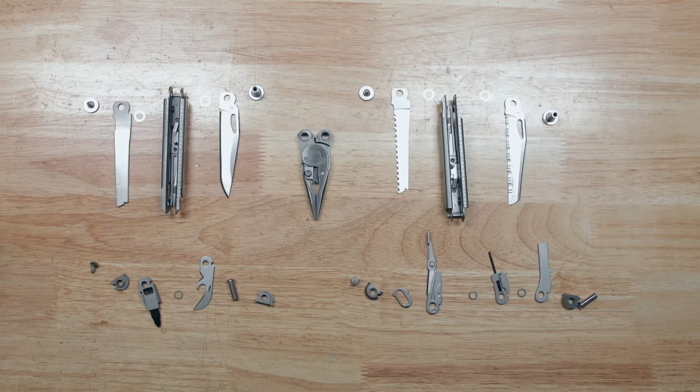This used to be a Leatherman wave. Obviously I've taken it apart, and typically when I take a multi-tool apart, I like to lay it out like this in the order that it was disassembled, so I know exactly how to put these things back together, working from the outside in. If you don't have a system, it can become really quite difficult.

But today, what we are going to do is take all of these parts, get those washers, and mix them all up and try to put it back together.

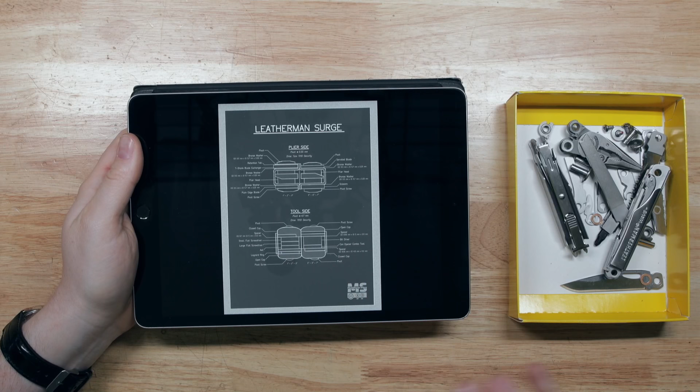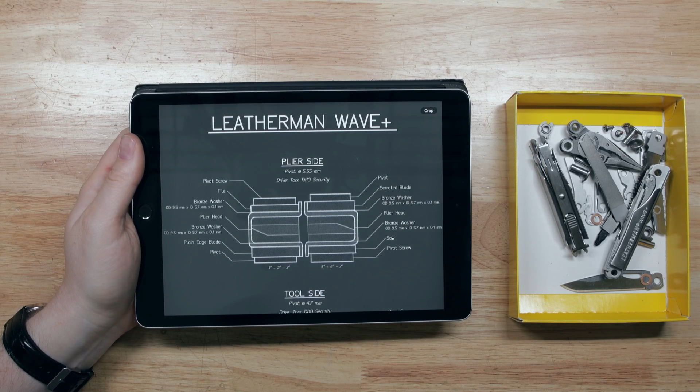Each of these diagrams has some useful information. We've got the pivot diameter as well as the drive size for that particular pivot set. We've also got callouts for the washers so you can see what size they are, because a lot of them look the same but are slightly different. All of this comes together to give you a comprehensive look at the construction of your particular tool.

So to see this in use, we've got our Wave Plus diagram here. You can see it says Wave Plus right up at the top. We've got that pivot information, and we know we're going to be using the T10 security Torx, which I've already got ready in our screwdrivers. So let's try and rebuild this Leatherman wave.

I'm going to start by finding the frame side I want. This one, you can see at the top, maybe says 1, 2, and 3 on the inch markings, and you'll see matching callouts here so you know which side of the frame goes where. I'm going to slide this off to about there so I can get to work.

That's the side we're going to start with. I would typically use just a simple brass punch to assemble these, but we're testing out some assembly tools that we'll talk about in a future video. So let's get to work.

I want to start with the plier head, and one thing I want to check here on the 1, 2, 3 side is which way the pivot screw comes in. You can see the pivot screws at the top, which means the pivot comes in from the bottom here. By the way, all of these are based off photos I've taken from the end of the tool, so if that helps orient that in your mind, I'll mention it now.

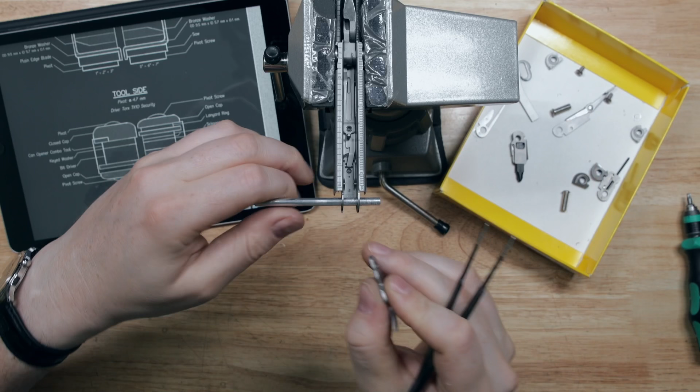And inside of our tool, we're going to start with the can opener on this side. So let's grab that. You know, as many of these tools as I have taken apart and put back together, I still cannot remember exactly what goes where.

And that's just on this tool. There's, like I said, lots of different tools available, so hopefully it'll help some of you guys out. I'm going to grab a keyed washer here and add that on next.

Tweezers are just helping my fat fingers find their way in between these frames. And next up should be, yes, it is the bit driver. So let's add that in place.

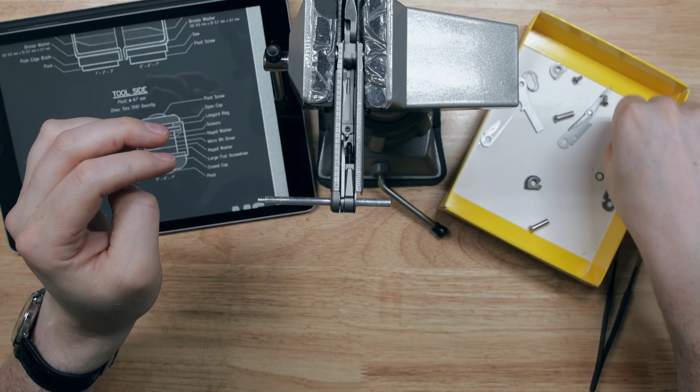And we can start adding our caps to the outside. Should be that guy there. These are all, like I said, called out in the diagrams. The lanyard ring does not go on this side. That's one thing I wanted to check.

And now we can get our pivot in place and drop it in like so. I lost our cap. That's okay. Slide that in place. We'll grab our pivot screw. I'm just pinching these so they don't fall apart on me. But everything's already in place. So let's tighten up that pivot screw.

And we'll be done with this side of the tool. So you can see how knowing where things go and having the right tools can be of great help here. We're not going to over tighten or worry about tension right now. That's something you can pretty easily adjust down the road.

We're just going to get them together.

All right, we've jumped over to the 5, 6, 7-inch frame. So we want to make sure we are orienting this right. For instance, this side here is going to, how do I show you this? This is kind of like this in our diagram. That makes sense, I guess.

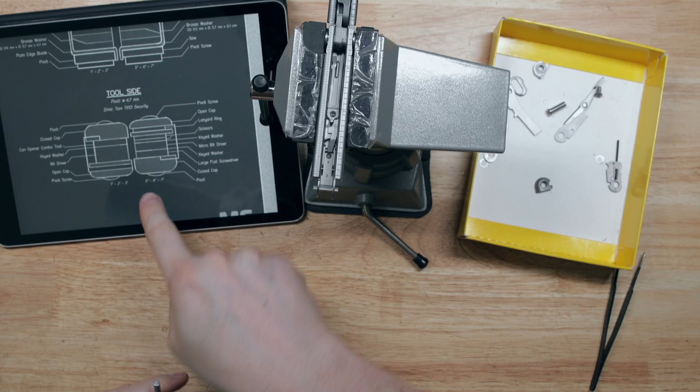So on that guy, we are going to look for our pivot, which comes in from the bottom down here. You see our pivot marked right there. Sorry if that's a little blurry, I know it's focusing up on the top here. So we'll insert our alignment tool from that end, and inside of there we're going to start off with the large flat screwdriver.

I almost start to feel like an expert doing this when I have these diagrams. It's kind of crazy. This is one of the other things I've talked about recently on a couple of things.

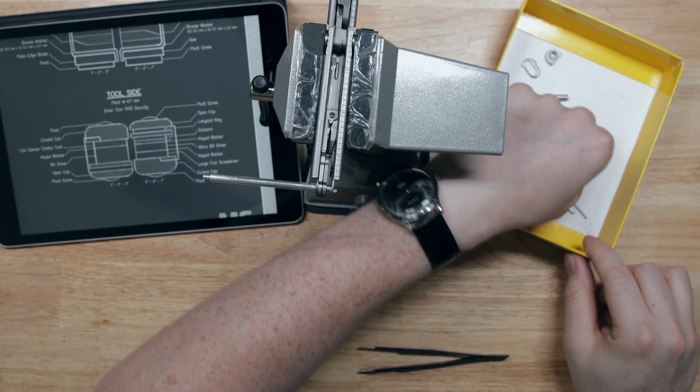Let's see, we need another keyed washer based on the diagram. I'm never going to be able to pick this up. There we go, grab that keyed washer there.

Rocking the Orient Bambino for those who are wondering. I've been wearing my G-Shock a lot lately, but just switching things up today.

Next up is the scissors, so we will get those sorted out. I'm going to slip those down in between, and this is where things will inevitably go wrong. I don't think they went wrong, that was crazy. All right, let's get our end caps in place again.

We're just going to do the left side because the last time the right side fell off. So we're going to get that left side in place, and we'll just pop our pivot straight through. Over on this side, I'm going to double check our diagram.

Yes, we are going to get our lanyard ring next, and I always put this on backwards, but this time I shall not, or at least I'll try not to. I know I'm blocking the view, I do apologize. That's just sometimes how things have to happen.

Will it stay? It'll stay, so we're going to leave it. Let's not breathe too heavily. Once that screw gets started, a sigh of relief goes through my brain every time, because it just means things are not going to come free on us.

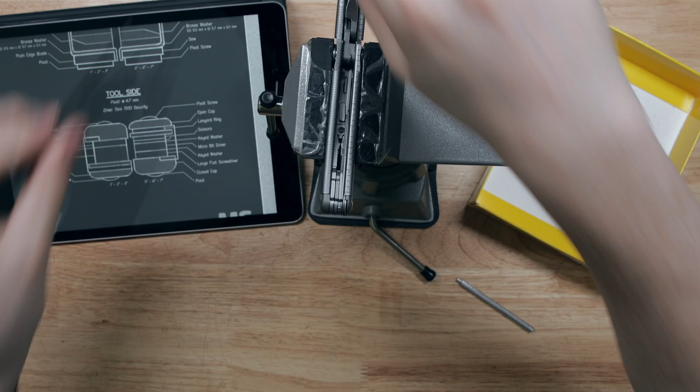And that's all of our parts. We didn't forget anything. Let's get this tool out and double check everything is good to go. Our pliers do fold in, they fold out, excellent. Our external tools, a little stiff, I would probably loosen that pivot, but they are working fine. And our internal tools as well, I hope.

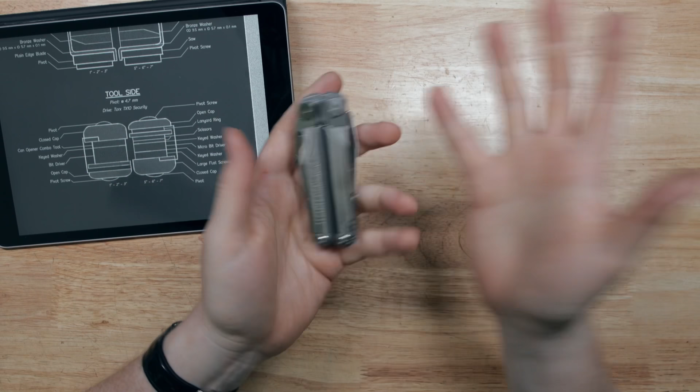Yes. So that's how quick, I don't know how long we've been recording, but that's how quick you can fully reassemble a tool from scratch with the help of these diagrams.